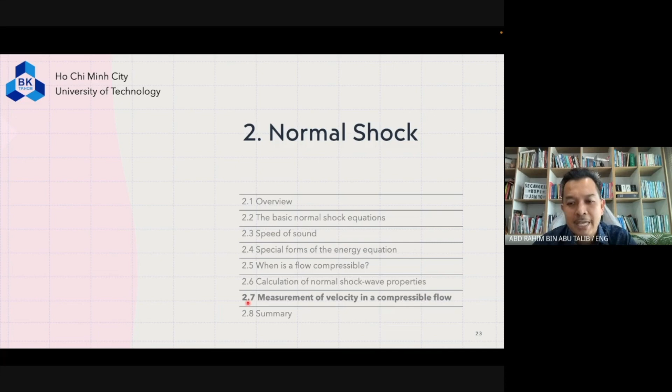So we have already done looking at several example calculations of normal shock wave. So we are now approaching our last, the second last subtopic, which is measurement of velocity in a compressible flow.

For incompressible flow, the velocity can be obtained from a knowledge of both the total pressure and the static pressure of a pitot tube at a point. So this is for incompressible flow, okay?

However, in compressible flow, both subsonic and supersonic, if we consider the Mach number rather than velocity, a knowledge of the pitot pressure and static pressure is sufficient to calculate Mach number, although the formulas are different for each Mach number regime. Just to remind ourselves, the regime of speed: low subsonic is less than 0.3,

where it is incompressible. High subsonic, you have a region of 0.3 to 0.8, where this is compressible flow. Transonic, this is the flight regime. Supersonic, more than 1.2. Hypersonic, more than 4.

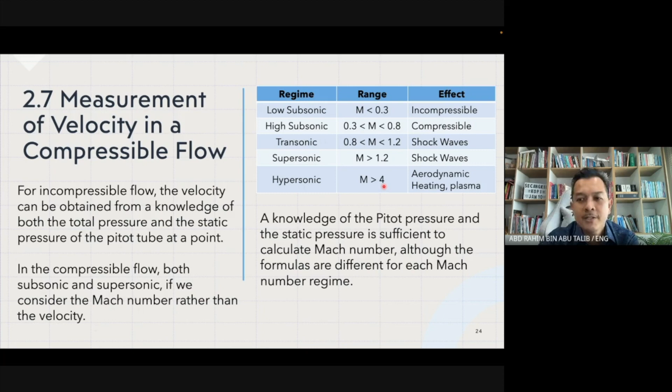So let us look into what are the measurements of velocity for incompressible flow. This is just a revision of how a pitot tube looks like on the ground, and then this is the pitot tube used on a typical aircraft, being fixed on the wing. So this is just an example on the wing.

Some pitot tubes on subsonic aircraft, or like normal jetliners, 737 or A320 or any other bigger aircraft, they have the pitot tube very near to the nose of the fuselage, nose of the aircraft.

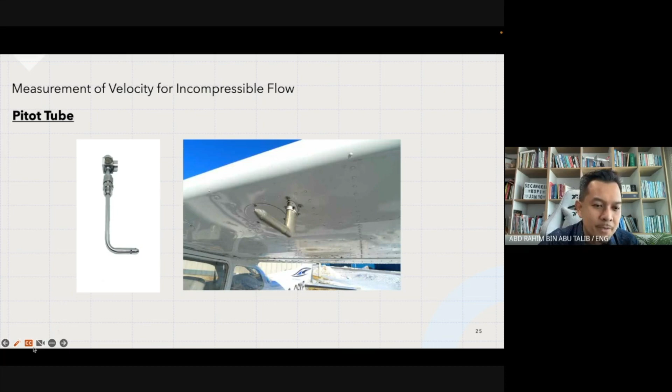All right, so if we look into the technique, the pitot tube, how does it work? So this is just a revision. P total equals P static plus P dynamic. So you can then rearrange to get the P dynamic, and dynamic pressure becomes half rho V squared,

and what basically is P static? Pressure you feel by moving with the flow at its local velocity. The total pressure is basically the pressure that the flow achieves when velocity is 0, and the dynamic pressure, sometimes called the velocity pressure, is basically the kinetic energy element, which is the increase in pressure over the static pressure due to motion.

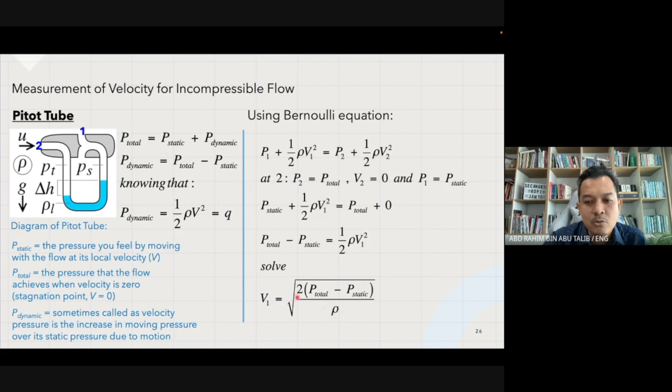So to find the velocity of the aircraft, basically you use the Bernoulli equation. Solve the Bernoulli equation and you will then get the value of the velocity from the corresponding value of the total pressure minus the static pressure, divided by the density times 2, to the square root. All right, so just a reminder for ourselves.

Now let us look into the compressible flow problem, measurement of velocity in a compressible flow. Okay, so imagine you have a subsonic flow, subsonic compressible flow. So you have the mouth of the pitot tube at point B, right? Pitot pressure is the free stream total pressure P01. Hence, a fluid element moving along streamline AB,

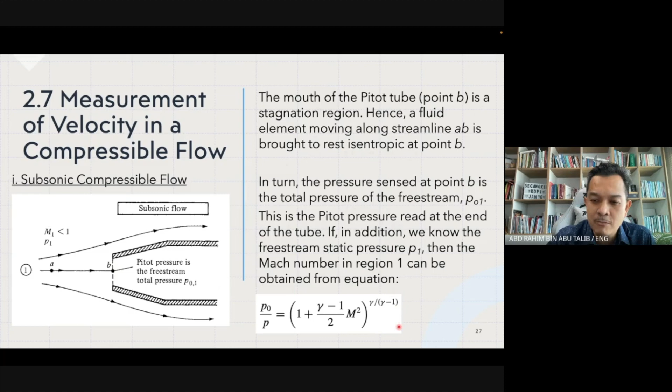So this is the pitot pressure read at the end of the tube. If in addition we know the free stream static pressure P1, then the Mach number in region 1 can be obtained from the equation that we have already looked at earlier.

So for this case, we can write the equation into the expression of P01 over P1, and solve for M1 squared, we can then get this expression. So clearly, from the equation, the pitot pressure P01 and the static pressure P1 allow the direct calculation of Mach number. So you can then directly get the corresponding value of the Mach number.

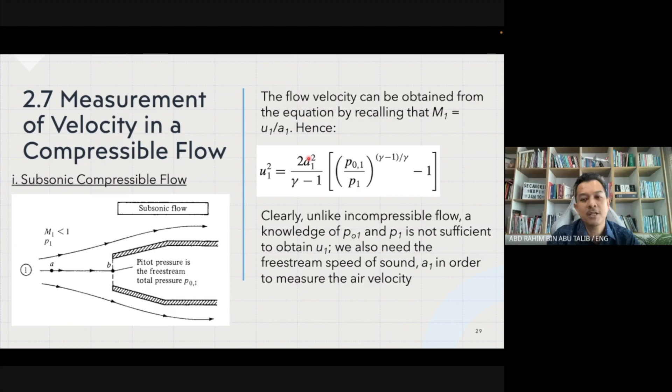All right, then the flow velocity can easily be obtained from the equation where we recall M1 equals U1 over A1. So we rearrange the expression for the velocity squared and we will get the value. Clearly, unlike incompressible flow, a knowledge of the P01 pitot pressure and the P1 is not sufficient to obtain U1. We also need the free stream speed of sound A1, which we have to find in order to measure the air velocity.

For supersonic compressible flow, we have a normal shock wave and the mouth of a pitot tube at point E. Imagine a shock and a vehicle or aircraft traveling at supersonic speed, with a pitot measurement there. At point E, it is at the stagnation region. The fluid element moving along the streamline from C to D to E, crossing the normal shock, is brought to rest at point E.

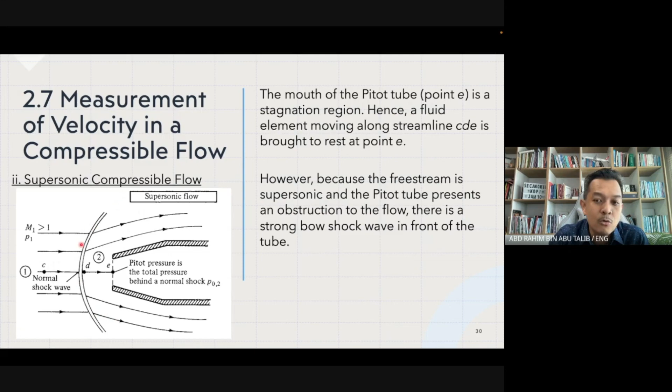However, because the free stream is supersonic and the pitot tube presents an obstruction to the flow, there will be a strong bow shock in front of the tube. So the streamline CDE crosses the normal portion of the bow shock.

A fluid element moving along streamline CDE will first be decelerated non-isentropically to a subsonic velocity at point D, and then isentropically compressed to zero velocity at point E.

As a result, the pressure at point E is not the total pressure of the free stream, but rather the total pressure behind the normal shock wave, P02. Keep in mind that because entropy increases, S2 minus S1 is greater than 0 across the shock, there is a loss in total pressure across the shock, where P02 is less than P01 before the shock.

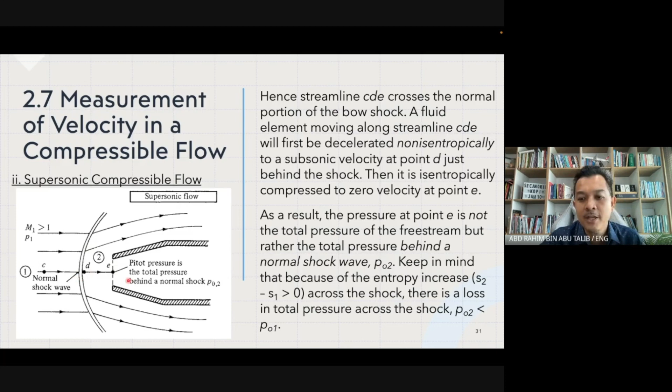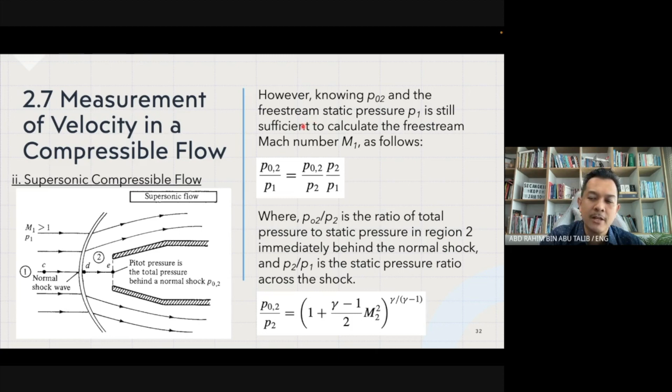However, knowing P02 and the free stream static pressure P1 is still sufficient to calculate the free stream Mach number M1. You can get it as follows, where P02 over P2 is the ratio of total pressure to static pressure in region 2, immediately behind the normal shock.

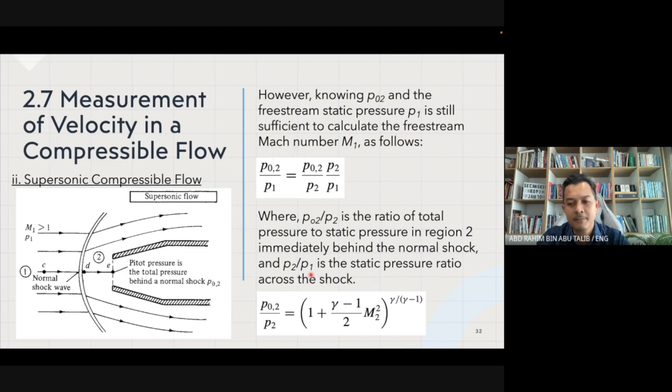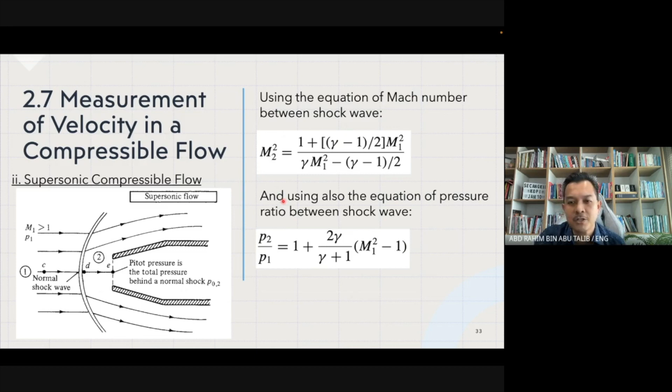And finding P2 over P1, which is the static pressure ratio across the shock, you can use this expression and the equation of Mach number, then also use the equation of pressure ratio across the shock wave.

So substituting all the previous equations into the pressure ratio, and after some algebraic simplification, you get this expression. This equation is called the Rayleigh-Pitot tube formula. It relates the pitot pressure P02 and the free stream static pressure P1 to the free stream Mach number M1. Look at the equation: M1 is an implicit function of the pressure ratio P02 over P1.

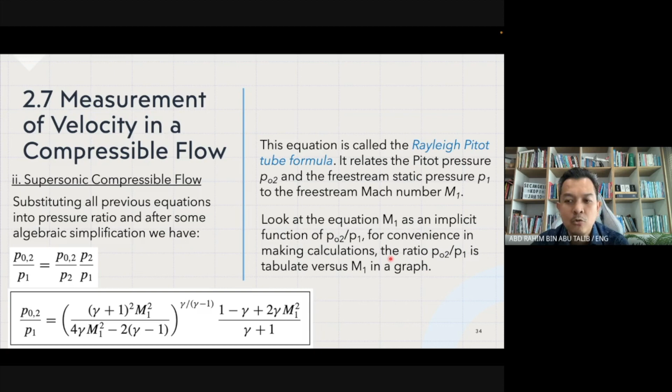For convenience in making calculations, the ratio of P02 over P1 is tabulated versus M1 in a graph. Now let's look into an example.

A pitot tube is inserted into an airflow where the static pressure is 1 atm. You have to find the flow Mach number when the pitot tube measures at three different conditions: 1.276 atm, 2.714 atm, and finally 12.06 atm.

First we must assess whether the flow is subsonic or supersonic. At Mach 1, the pitot tube would measure a pressure ratio P naught over P of 1.893. Hence if P naught is less than 1.893 atm, the flow is subsonic. When P naught is above 1.893 atm, the flow is supersonic.

So now you can determine which condition is subsonic and which Mach number is more, which is supersonic.

Condition A: pitot tube measurement is 1.276 atm. The flow is subsonic because it is less than 1.893. So the pitot tube is directly sensing the total pressure of the flow. You can immediately go to Appendix A, where P naught over P equals 1.276 gives a Mach number of 0.6.

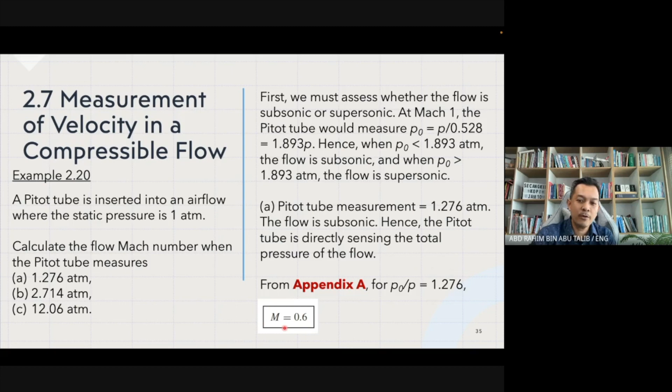For pitot tube measurement of 2.714 atm, the flow is already supersonic, so the pitot tube is sensing total pressure behind a normal shock wave. So look at Appendix B instead of Appendix A. For the pressure ratio of 2.714, you will read the value of M1 to be 1.3 Mach number.

Finally, for pitot tube measurement of 12.06 atm, it is supersonic. You can now also go into Appendix B at a pressure ratio of 12.06, which reads a Mach number of 3.

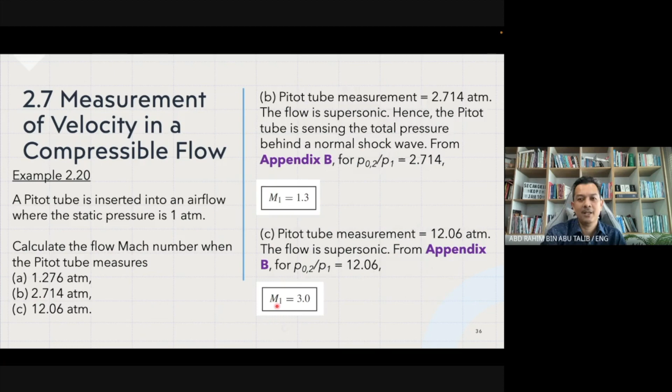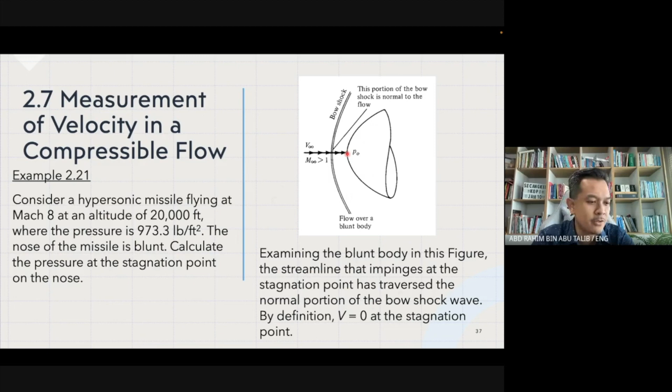Examining the blunt body in this figure, the streamline that impinges at the stagnation point has traversed the normal portion of the bow shock wave. By definition, the velocity at this point, known as the stagnation point, is V equal to 0. Since the flow is isentropic between the shock and the body, basically what happened between this bow shock and the nose of the missile.

The pressure at the stagnation point on the body is the total pressure behind the normal shock with an upstream Mach number of 8. Let us denote the pressure at the stagnation point as PS. Since P02 is the total pressure behind the normal shock, then PS is equal to P02.

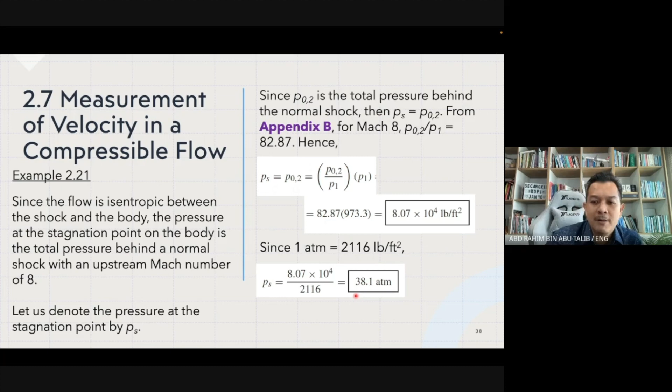From Appendix B, looking at Mach 8, you get the pressure ratio to be 82.87. Hence, finding the stagnation pressure PS, which is equal to P02, you get the value of 8.07 times 10 to the power 4 pounds per square foot. Since 1 ATM equals 2,116, you get PS, the stagnation point pressure, to be 38.1 ATM. Note that the pressure at the nose of the missile is quite high, 38.1 ATM.

This is typical of hypersonic flight at low altitude. As a check, this problem can also be solved by first calculating the upstream total pressure from Appendix A, and then using the total pressure ratio across the normal shock from Appendix B.

If we go through the calculation using Appendix A at Mach 8, the pressure ratio given here is 0.9763 times 10 to the power of 4. You then get the pressure at P01 to be 9.502 times 10 to the power of 6.

Then looking at Appendix B for Mach 8, you get the pressure ratio of 8.8488 times 10 to the power minus 2. Then you find PS to be 8.07 times 10 to the power of 4, which is the same result.

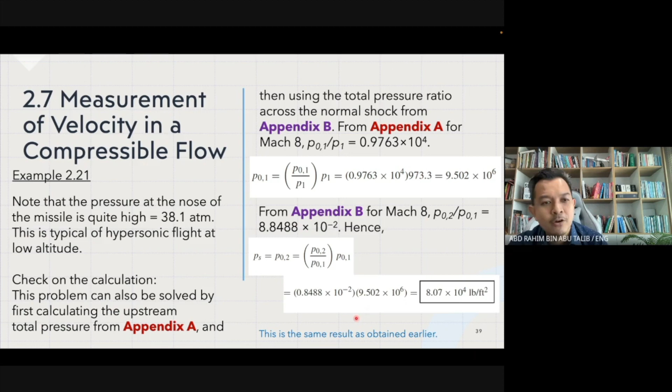You can have a different approach to finding the solution.

Our very last example concerns measurement of velocity in compressible flow. Consider the Lockheed SR-71 — I believe most of you have already seen this particular popular aircraft. This is the Lockheed Martin Blackbird. It is normally flown at an altitude of 25 kilometers, and the pressure measured by a pitot tube on this airplane gives a value of 3.88 times 10 to the power of 4 Newtons per square meter. You have to find the velocity of the airplane using just the pitot tube value.

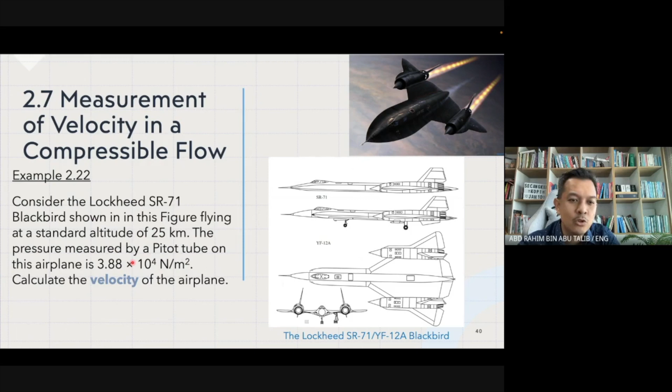Now looking at Appendix D — why do we want Appendix D? Because it mentions 25 kilometers. In Appendix D, at 25 kilometer altitude, you read the corresponding pressure and temperature values. You can now obtain the pressure ratio of 3.88, which was already read by the pitot tube, divided by P1 at 25 kilometer altitude, giving you the corresponding pressure ratio.

Then use this pressure ratio value to look into Appendix B and find the corresponding Mach number. So if we go to Appendix B, we want to find the pressure ratio of 15.35.

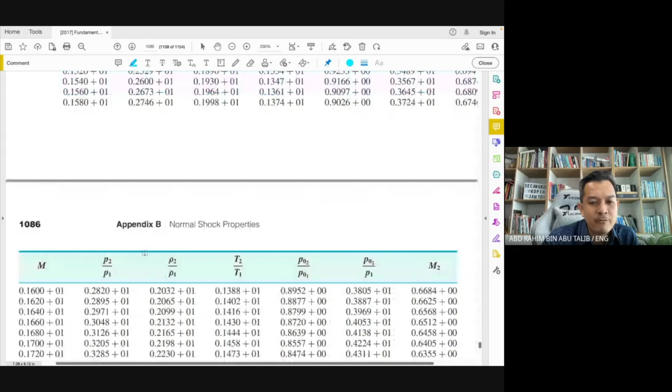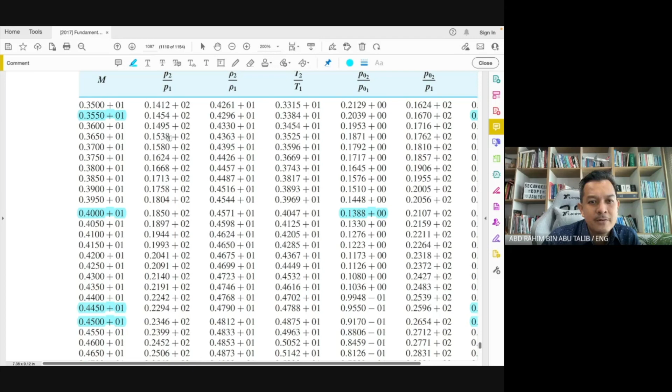This is 1.5, we go a bit down, looking for the pressure ratio of 15.35. I think this is about here, so we have a Mach number of 3.4.

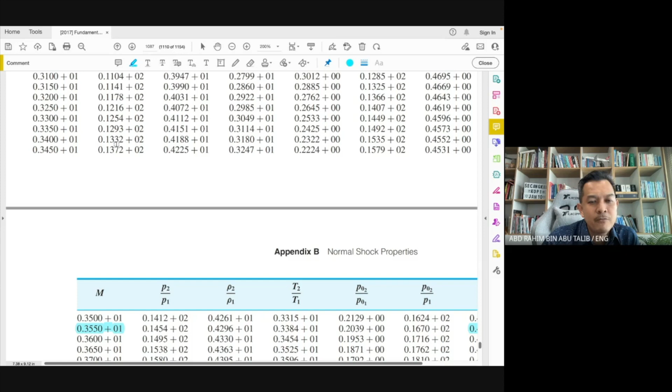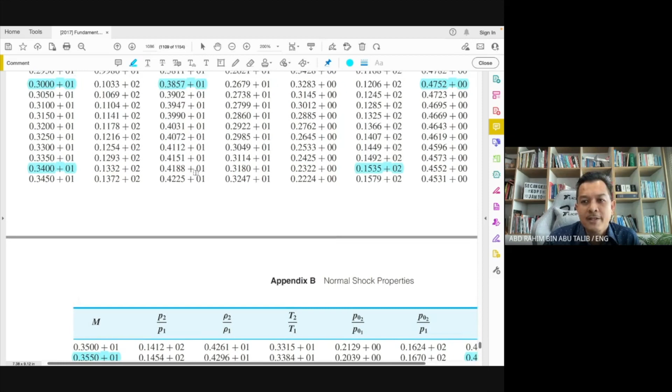Okay, 15.35, so you have a Mach number of 3.4. You then calculate the speed of sound to become 295 meters per second. So thus the velocity, putting the value of the Mach number and the speed of sound, you get it to be traveled at 1003 meters per second.

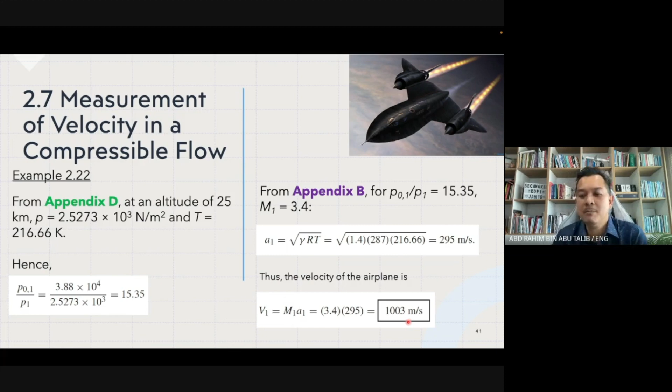Okay, so we have already completed all the examples in relation to the normal shock, and let us go into the summary, just to recap what we have already gone through so far in the past 3 lectures, from lecture number 3, lecture number 4, and today is lecture number 5.

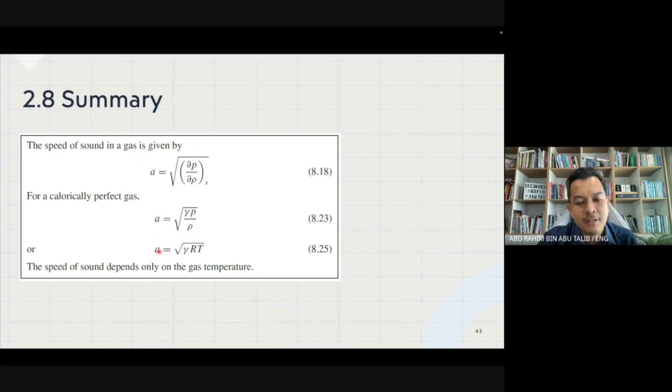The speed of sound depends only on the gas temperature, right? So if you want to find the speed of sound, you just use the square root of gamma RT, all right?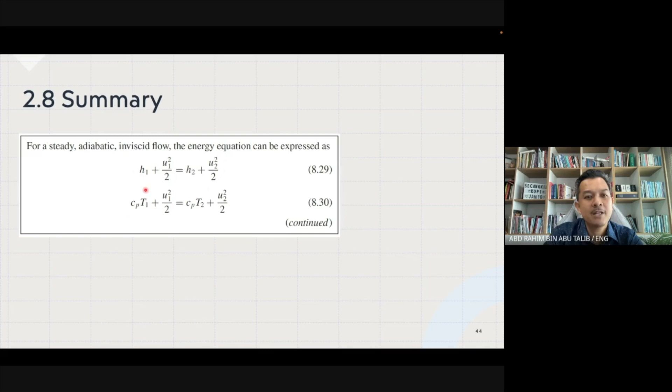For a steady adiabatic inviscid flow, the energy equation can be expressed using the enthalpy and the velocity. So you have H1 plus U1 squared over 2, which is equal to H2 plus U2 squared over 2, where we know already H equal to CPT, where CP is the specific heat capacity at constant pressure times the temperature, right? So you can express the energy equation. This is known as the energy equation.

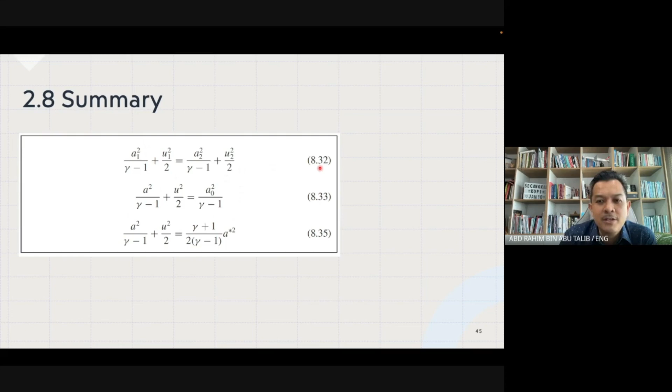Next, by knowing the value of CPT, you can then rearrange the value by having the speed of sound inside the equation, right? So we have equations 832, 833, and 835, all right?

So total conditions in the flow are related to static conditions via this expression: CPT plus U squared over 2, which is equal to CPT naught, right? And you can also have the temperature ratio expression as a function of Mach number, the pressure ratio expression of the Mach number, as well as the density ratio expression for the Mach number. Note that the ratios of total to static properties are a function of local Mach number only, and these functions are tabulated in Appendix A for isentropic flow properties, right?

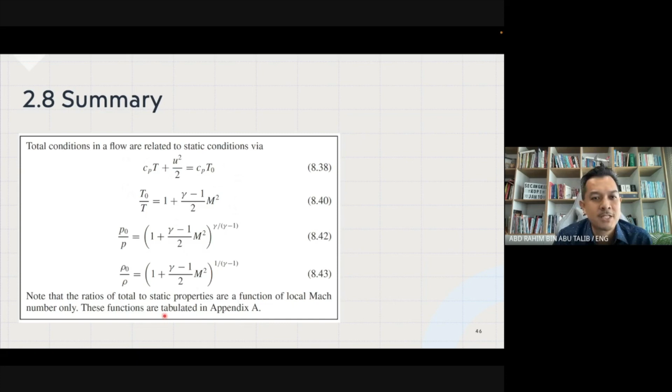And then for normal shock, so basic normal shock equations, we have three equations: continuity equation, expression 8.2, momentum equation, expression 8.6, energy equation, expression 8.10. These equations lead to relations for changes across a normal shock as a function of upstream Mach number M1 only. And so you can use this expression to find the value of M2, subject to the availability of, you have to first calculate the value of M1, all right?

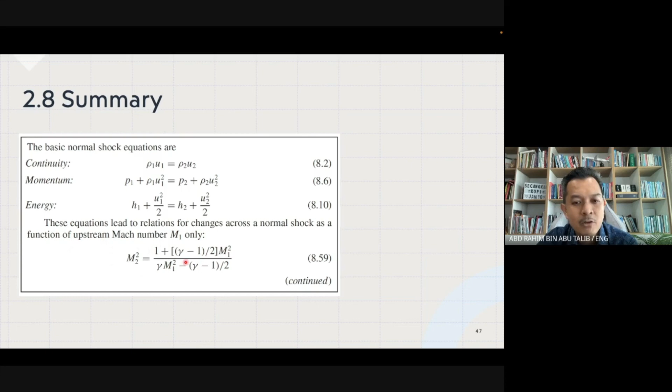Okay, to continue, you have the density ratio value, the pressure ratio value, and then you can get the values expressed in terms of the temperature ratio and the enthalpy ratio, right? So this is the entropy conditions, right? And another expression, 8.68 and 8.73, which lead to the normal shock properties, which are tabulated versus M1 in Appendix B, right?

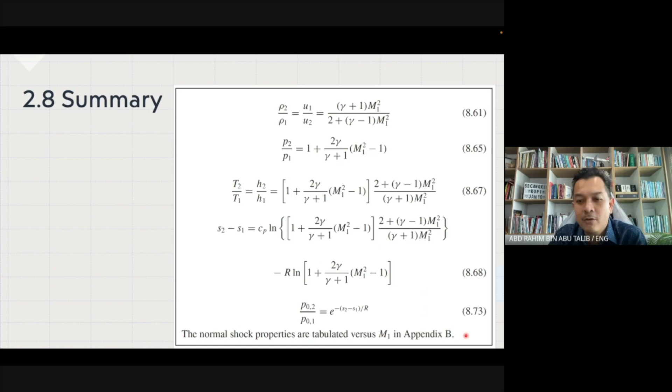So, for example, if you are finding a condition of Mach number, you can then get the corresponding pressure ratio, corresponding density and temperature ratio, and corresponding M2, all right?

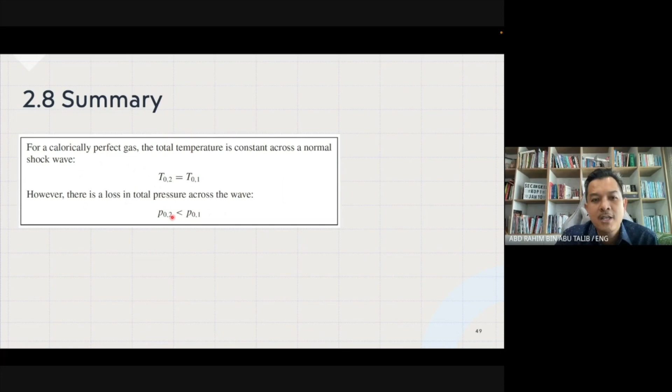For a calorically perfect gas, the total temperature is constant across a normal shock wave, and this is our assumption that T02 equal to T01, because it is constant. However, there is a loss in total pressure across the wave, and the pressure will be reduced when the flow crosses the normal shock wave, right?

For subsonic and supersonic compressible flow, the free stream Mach number is determined by the ratio of pitot pressure to free stream static pressure. However, the equations are different. For subsonic flow, it is expressed as equation 8.74. For supersonic flow, you can find the values to be obtained from this expression, 8.80.

So as I said earlier, these equations are normally being used, and you can use it as normally being given, so you do not have to memorize most of the equations. All right, as long as since you do not have to memorize, you must ensure that you know which equation to use, which table to refer to, especially Appendix A and Appendix B.

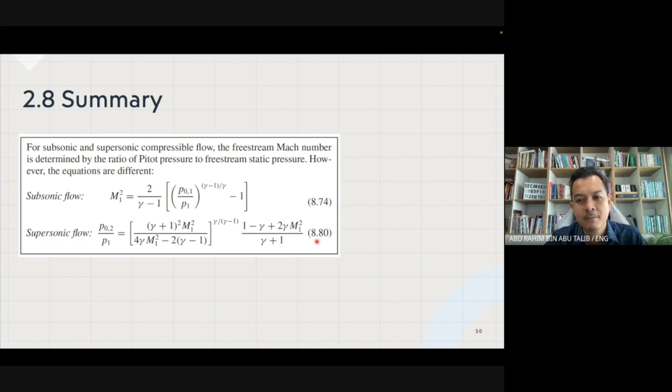At the same time, if it requires you to look at Appendix D for the values at different altitudes, right? Because it requires different pressure and also different values of temperature and density, if the aircraft is traveling at a different altitude. So with that, that wraps up our topic on normal shock.